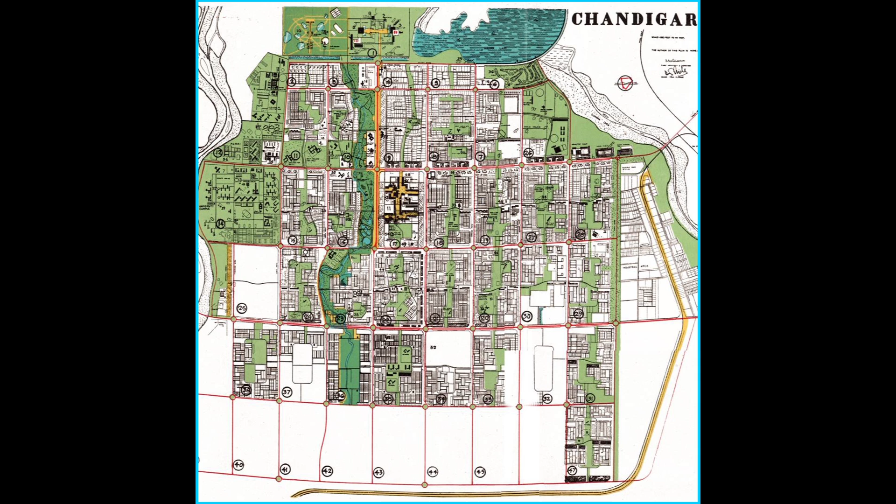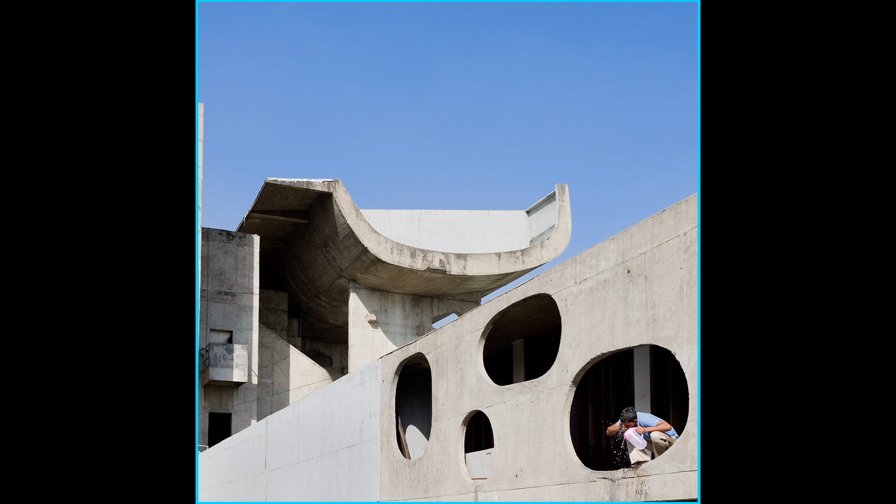60 years after its construction, the city of Chandigarh, entirely designed by Le Corbusier as a political manifesto, has been taken over by its citizens in many different ways from what it was intended for. Daily activities happening in the windows of the assembly hall, or notaries' attestations at the entrance of the same building, are the paradigm of many designs to come. The design of cities becomes, regardless of the intent of the architect, a citizen's issue.

In 1974, a group of street performers called ASCO used the same street in which LA County sheriffs opened fire on innocent students and protesters four years before, to claim precisely the reinvention of the public space. In Spain, many plazas and streets have been colonized by citizens, and the architect has had to redefine their role, and that is precisely what we aim to do.

In Alicante, instead of having successful and active places, the urban measures implemented in recent years seem bent on hindering the possibilities for enjoyment, socializing, and meeting in the public space. Instead of public-friendly places, we are more likely to find individual seats scattered along the city. Opportunities for leisure and socializing are very limited.

Specifically in the Town Hall Plaza, this problem is aggravated by high traffic density. Cars in and around the square interrupt the main walkways. Shops and terrazas are everywhere, and it is virtually impossible to stroll to the center of the square.

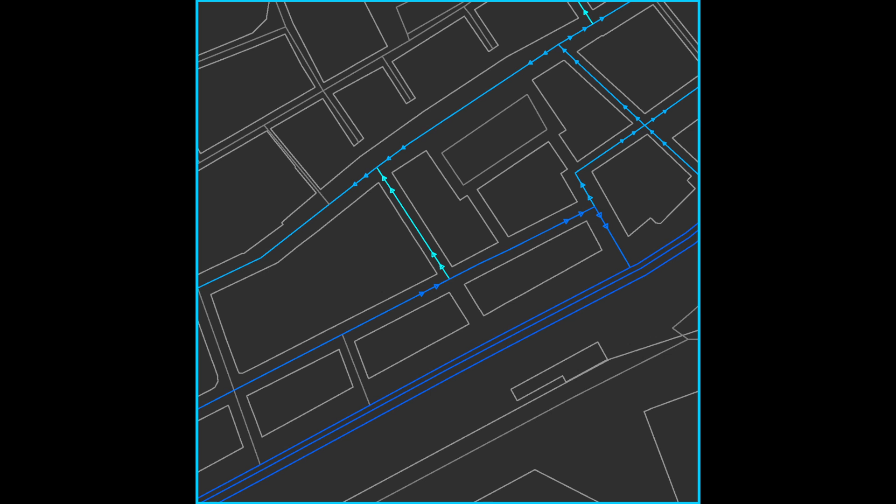As the main problem in the zone is the heavy traffic around the square, we urge measures be taken for the defense of alternative existing routes of the city, changing the law to enable access exclusively for buses, residents, and licensed car owners. This will not only be beneficial to the conservation of the historic center of Alicante, but also will generate a safer and more enjoyable atmosphere in the square and in the adjacent streets.

We emphasize the need to differentiate the pavement, and this will serve to visualize a safe area from traffic, something which is very useful, especially for children. This extension will mark the public area, which must not be invaded by any private business or terrazas anymore.

Other proposals are linked to a performative reality of the square. The plaza turns into an open-air stage from time to time, so we intend to enhance these performative uses. Our aim is to foster, facilitate, and promote the main activities and performances programmed in the plaza, such as Hogueras de San Juan, the ice rink, and the street market.

These are some of the activities that make the square important and recognizable for Alicantinians. So the proposed prototypes that we show here intend to facilitate these activities while promoting a more daily, active, and quotidian use of the plaza.

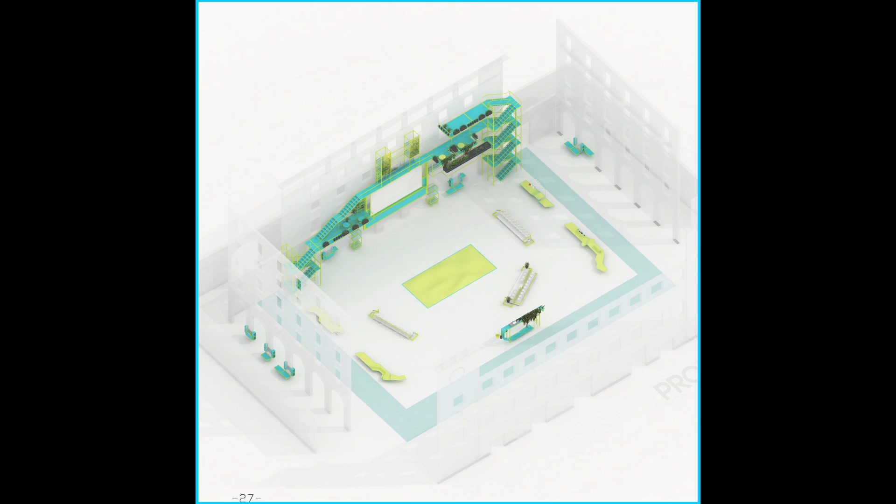All these uses of the plaza enrich the cultural experience of the city. We do want to maintain these customs and traditions, taking into account the economic advantages for the city that they imply, but we also want to keep an active debate on the necessary reconfiguration of the square.

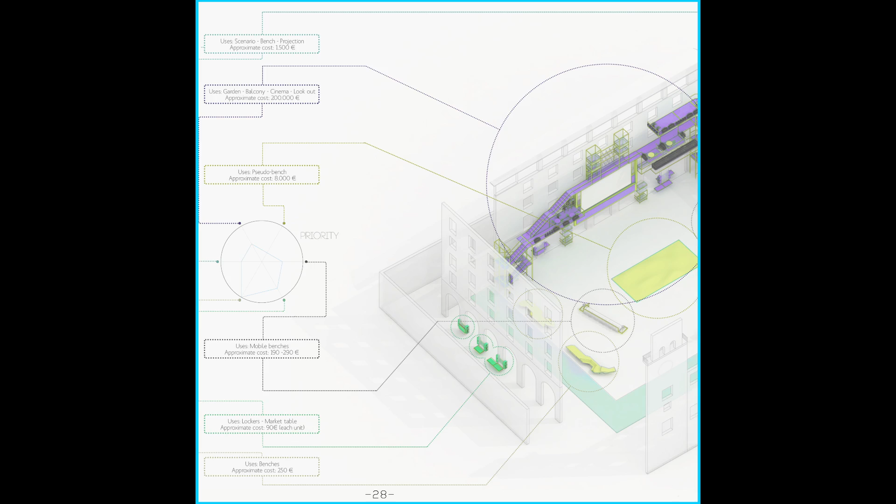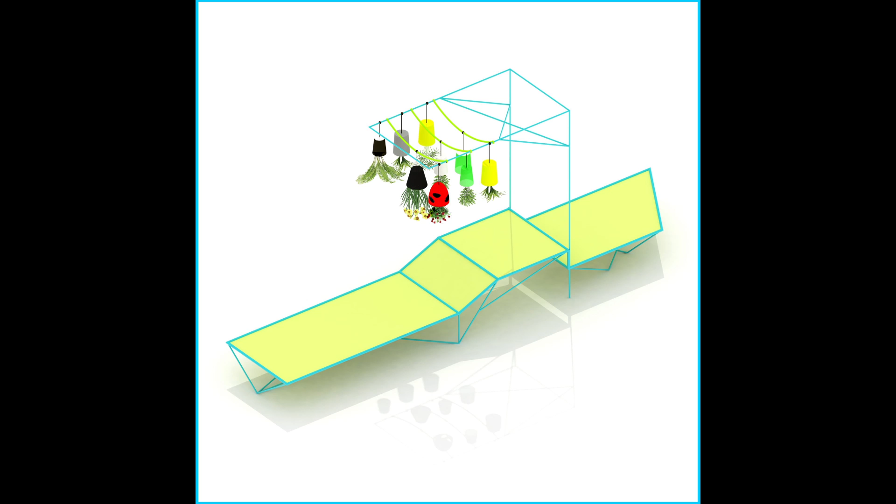One of the elements that we consider in our proposal are benches. We propose benches of different styles equipped with vegetation. These benches would be movable so that they won't impede the installation of the Hogueras de San Juan or other structures. The design of a prototype that serves as a folding table and lockers anchored to the columns makes unnecessary the entrance of cars to the square to build the street market.

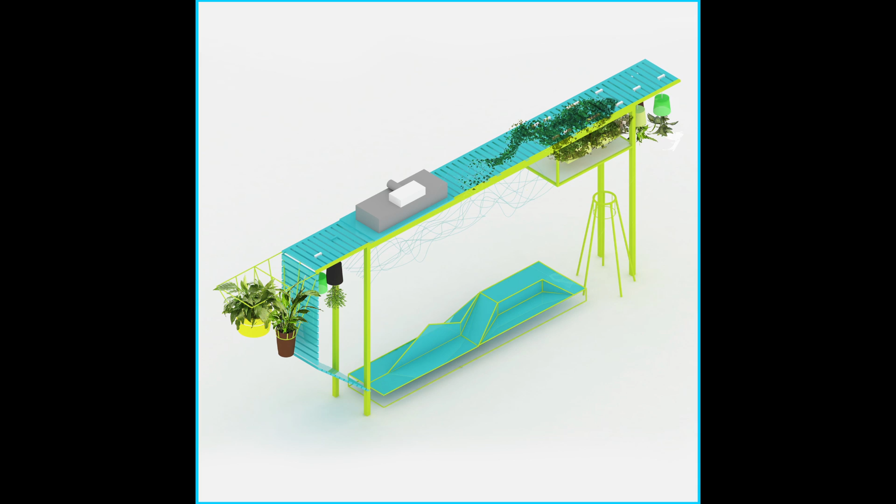The presence of weddings in the square is a great opportunity to establish a small stage for photos and a chill-out space for guests. We propose to reverse the excessive anthropocentric reality of the square and to improve its reduced associative life through the implementation of a reversible space.

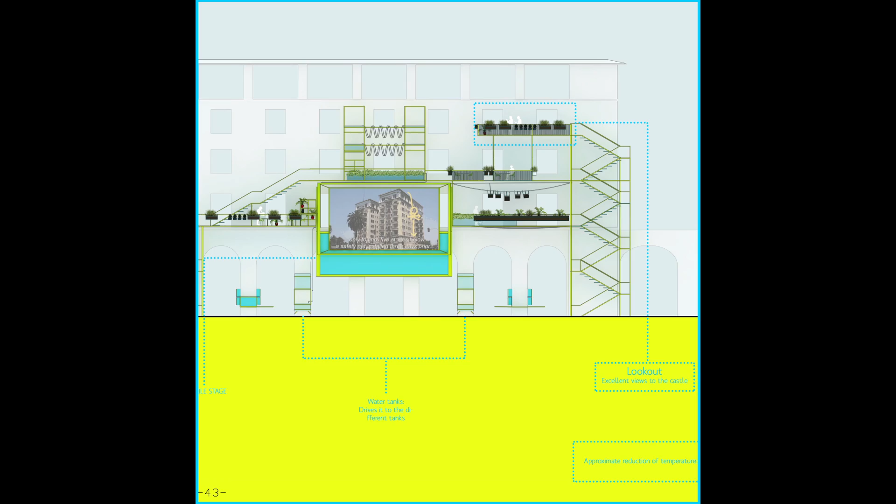A reversible space equipped with a vertical garden, with balconies of public use, a viewpoint, a stage, and even a projection screen. That will be accompanied by economic public equipment that will not only help enhance the vitality of the square, but will also enjoy the coexistence of human and non-human agents.

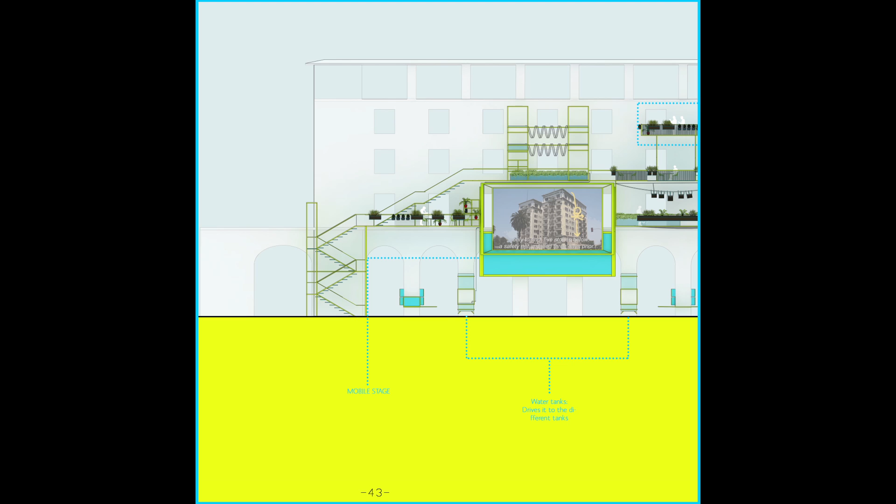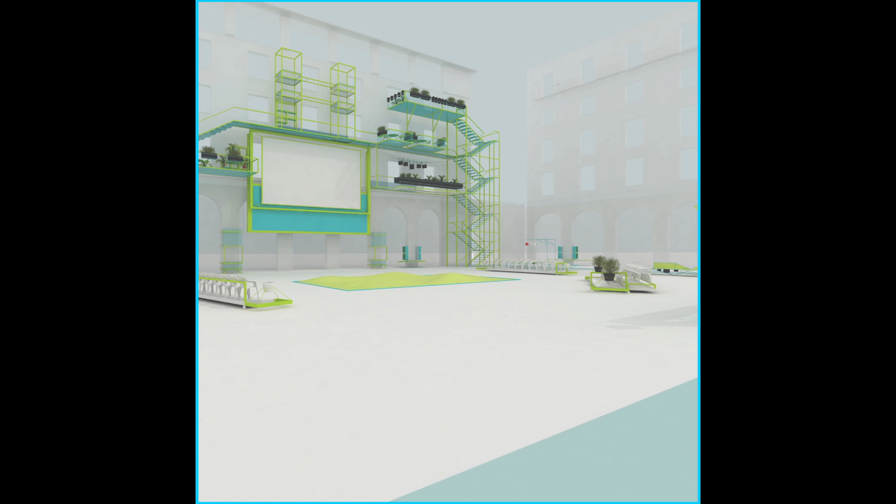Finally, the existence of fountains and hydraulic devices opens the possibility to generate pneumatic furniture for everyday enjoyment of the square. What we have brought here is not a finished and definitive project, but a series of alive objects ready to be kept, to be destroyed, or simply changed.

We believe that the value of this project is based on the diverse problems and the different opportunities to be faced. We try to offer different actors the possibility to participate in the construction of this cooperative design.